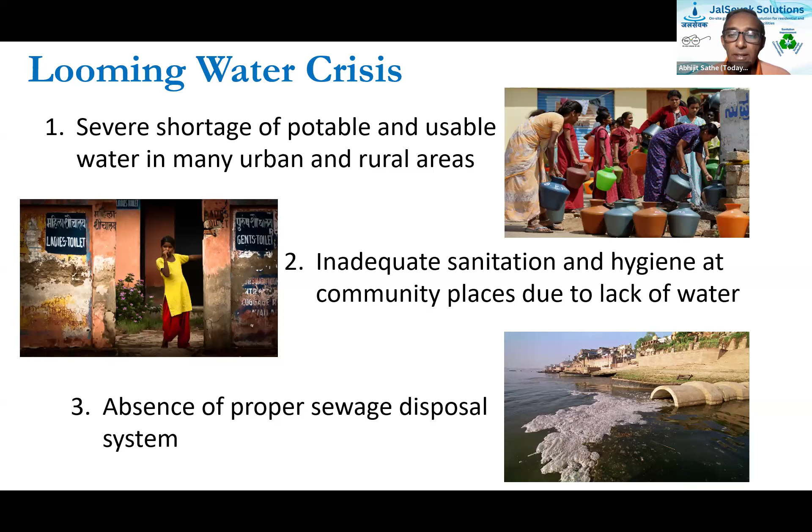And if you look at the size of a city like Pune, we probably generate hundreds of millions of litres of wastewater per day, and all of that either is treated very minimally or it doesn't get any treatment at all. So this has caused very severe pollution in our rivers, as we can see in Mula Mutha and other rivers around Pune. And this situation is very similar in most of the Indian cities and communities. So we are trying to address this problem by recycling our own wastewater on site. So these are the challenges.

If we think about any wastewater solution available, we only have the centralized sewage treatment plant as the only option. And these are only suitable for large facilities. They often come in size of half MLD or even bigger than that, 2 MLD, 5 MLD, which are suitable for big apartment complexes, municipal size plants and so on.

The STPs are very high in both capital cost as well as operating cost. They need a lot of area, a lot of planning. Upfront capital is required. They consume a lot of electricity. We have heard this feedback from so many societies or committees saying our STPs are not working because of the maintenance issues or the very high electricity bill we are getting because of the STP, and so we have stopped using these sewage treatment plants.

So as a result, the only solution is to move to a decentralized way of treating our sewage. The centralized means of collecting all sewage in one place and then treating it, that doesn't work efficiently at all.

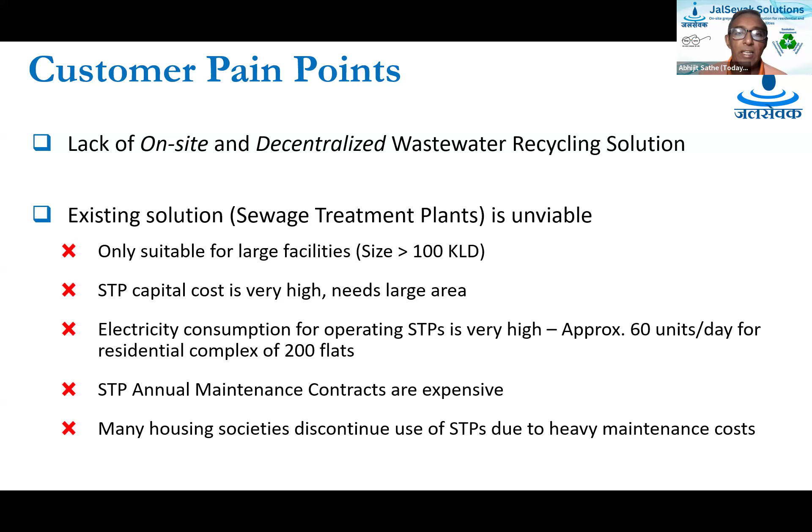So the only way, like I said, is the on-site treatment of our wastewater. These are some of our competitors. As we know, there are many companies in India who provide very sophisticated sewage treatment plants like VA Tech Wabag, Thermax, Siemens. There are many MNCs as well as local players, and all of these companies provide very large

STPs. They need a lot of size, and huge planning is required during the time of construction. It is impossible to fit these plants after the building is complete, they cannot be retrofitted, and they need, like I said, high capital cost as well as very high operating cost owing to the electricity requirement.

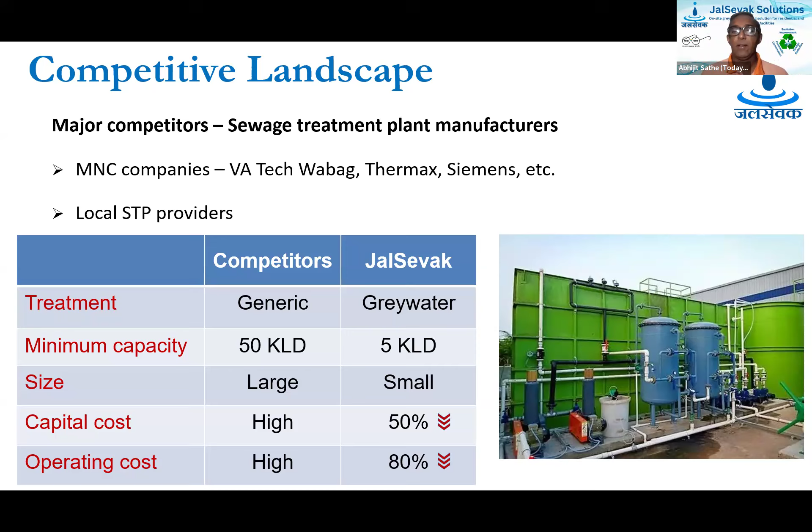So this is what we propose. We have developed this on-site and compact treatment plant to treat our wastewater from shower, laundry, washing machine, hand washing, dishwashing, and so on. All of this grey water is collected from either an individual house or apartment or a hostel or a hotel. It's collected into our plant, which is very small and requires very low footprint. And this water is treated using multiple levels, which I will show in the next slide.

And the resultant treated water is then reused in the same facility for flushing of toilets, urinals, bathrooms, floor cleaning, construction. PMC last year issued an advisory saying all the new construction projects should not be using fresh water. They should only use treated water for concrete mixing, curing, and other activities.

Right now, most builders either use borewell or tankers for the construction, which is consuming a lot of fresh water. So our effort is to also work with builders and developers to make this grey water available for their construction activities. And this is a very scalable solution.

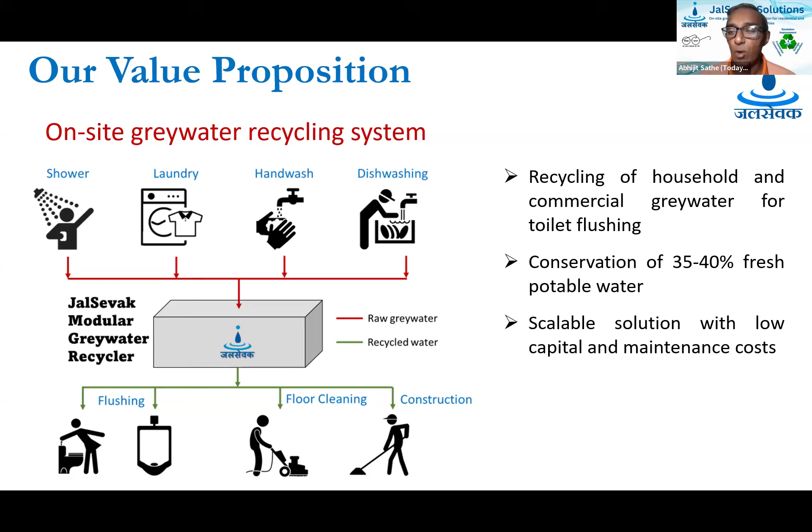We have installed this at places like an individual house where only 4 or 5 people are staying, as well as in a large hotel with 500 rooms, generating around 80 to 100 kiloliters of grey water every day. So this is a very scalable solution, and as I mentioned, it requires very less space, low capital, as well as low maintenance. Now I will pause this presentation here to play one short video.

So just allow me to play this video, and let me know if it is audible.

In today's rapidly urbanizing world, water has become a highly valuable resource. JalSevak Solutions is an Indian startup that is striving to address the most pressing issues our cities and towns are facing. On the one hand, there is increasing shortage of potable and usable water across several cities, leading to dependency on tankers. At the same time, most cities lack reliable sewage treatment and disposal systems, resulting in large-scale contamination of natural water bodies.

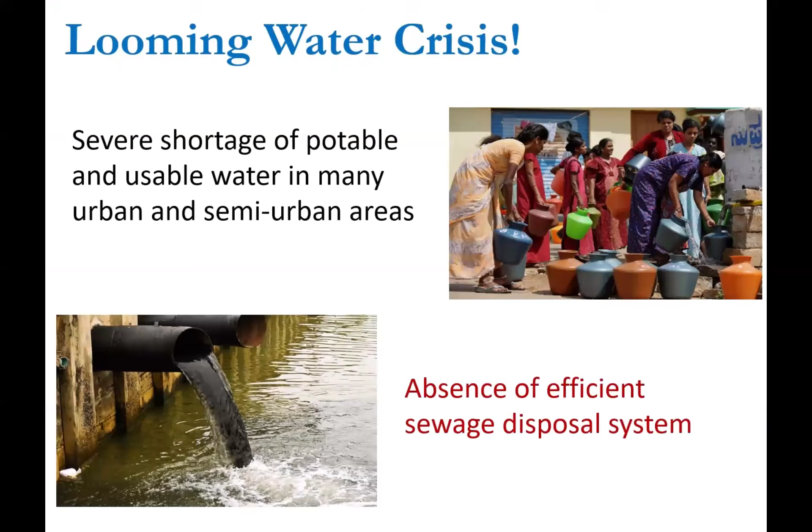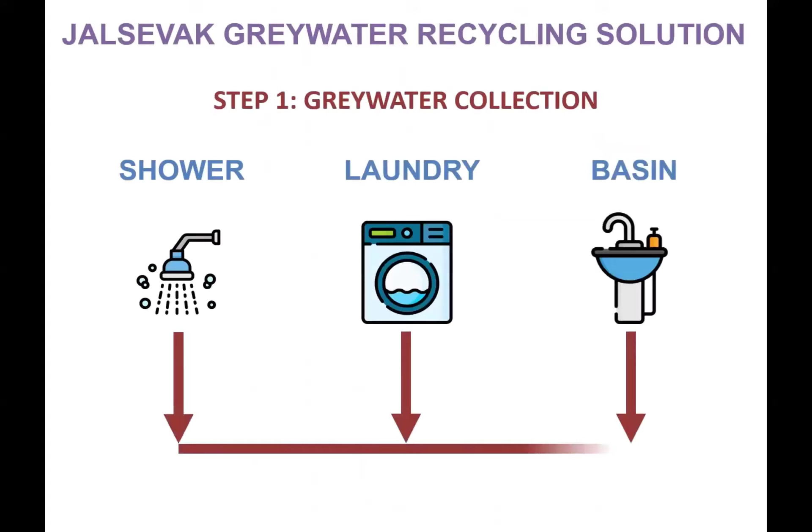Did you know that wastewater generated from our daily activities like shower, laundry and hand wash is called grey water? Approximately 55% of our household wastewater is grey water, while the rest is sewage. Using JalSevak's patented and cost-effective treatment process, it is now easy to recycle and reuse our household grey water. In the first step of the treatment process, raw grey water from shower, hand basin and laundry is collected using a separate drain pipe. The collected grey water is treated using coagulation, multiple levels of filtration, chemical treatment and aeration.

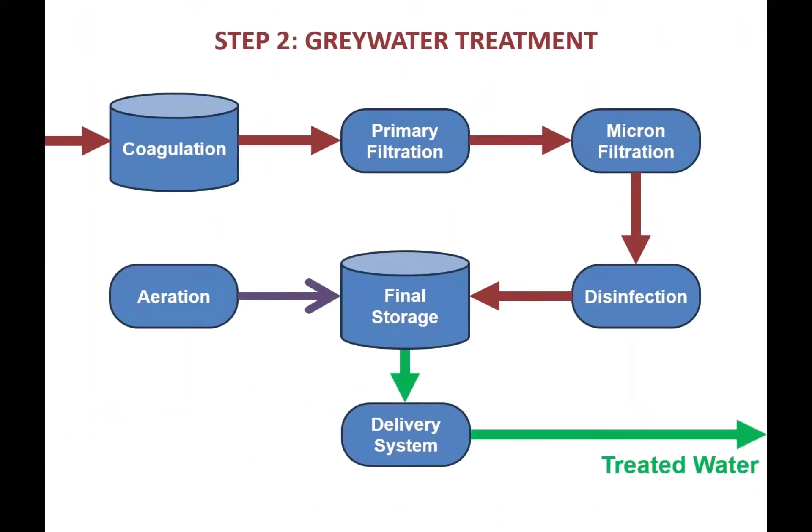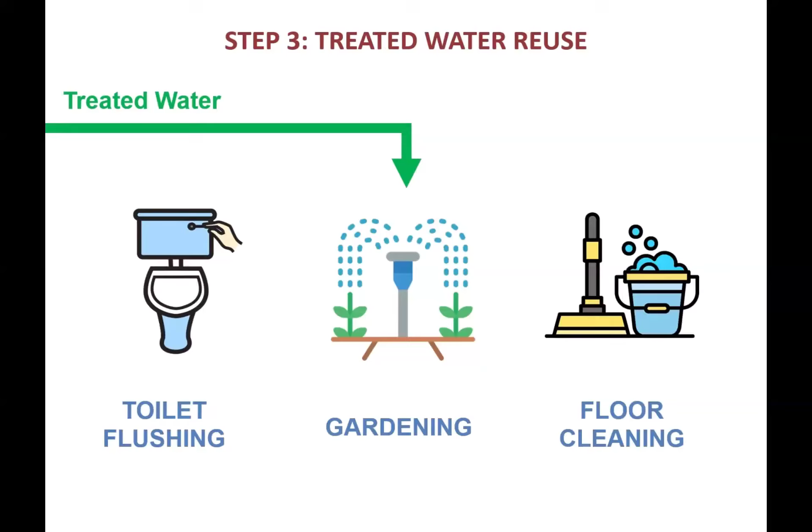These processes not only remove all suspended particles from the water but also destroy bacteria and pathogens. The system operation is fully automatic and requires least amount of human involvement. Finally, the treated water is sent for reuse in activities like toilet flushing, gardening, floor cleaning, etc. Quality of the treated water is closely monitored using parameters like pH, turbidity, COD, BOD and coliform. JalSevak's scalable, affordable and sustainable treatment solution can potentially save 30 to 35% freshwater in every household by recycling greywater.

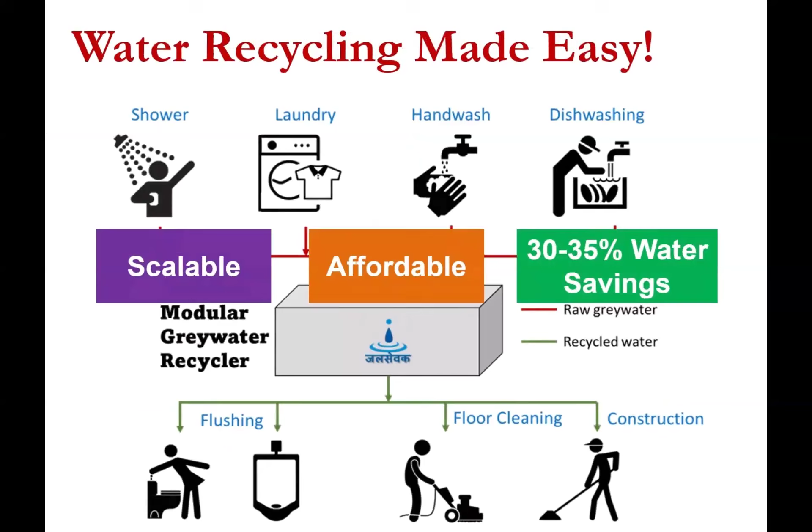This solution is ideal for installation in facilities like homes, apartment buildings, hostels, hotels, resorts and so on. It can be installed in existing as well as under construction facilities. JalSevak Greywater treatment system has received CII Green Pro eco-labeling that makes it suitable for installation in certified green homes. Griha Council has also included JalSevak system in their green building materials catalogue.

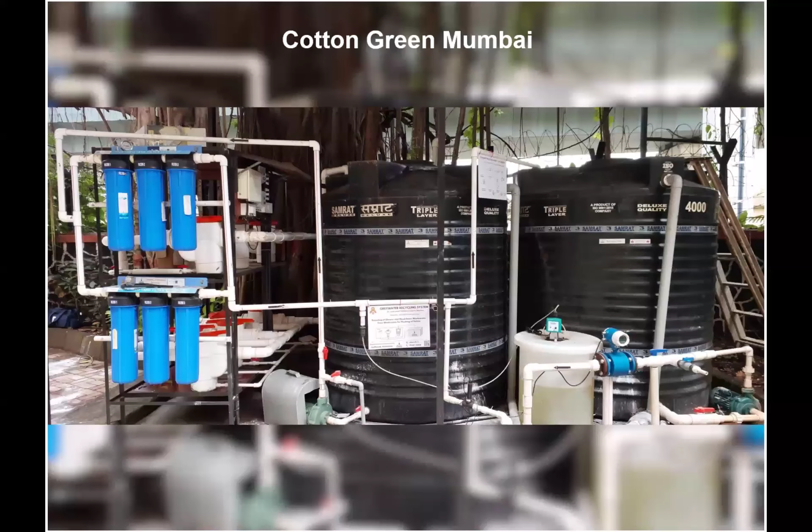Out of the 17 Sustainable Development Goals adopted by the United Nations, JalSevak Greywater Recycling Solution satisfies these three goals: clean water and sanitation, sustainable cities and communities, and climate action. JalSevak Greywater recycling systems are working in facilities like resorts, charitable trusts, hostels, with capacities varying from 1,000 litres per day to 80,000 litres per day depending on number of users and application of treated water.

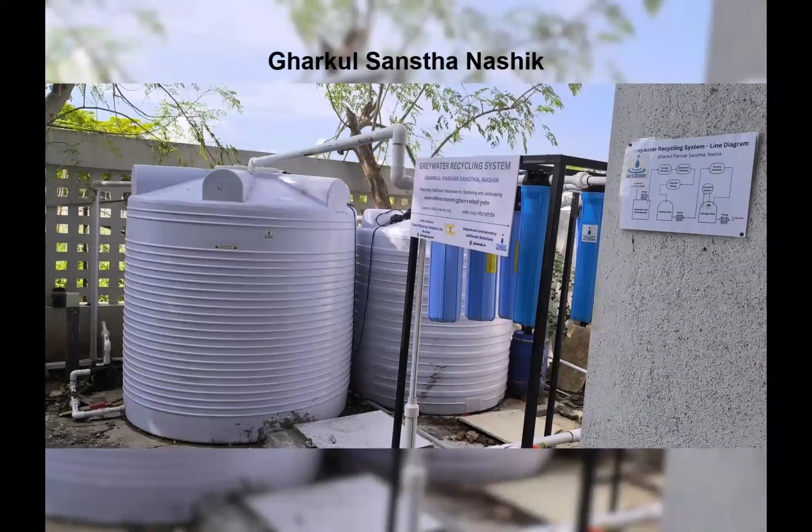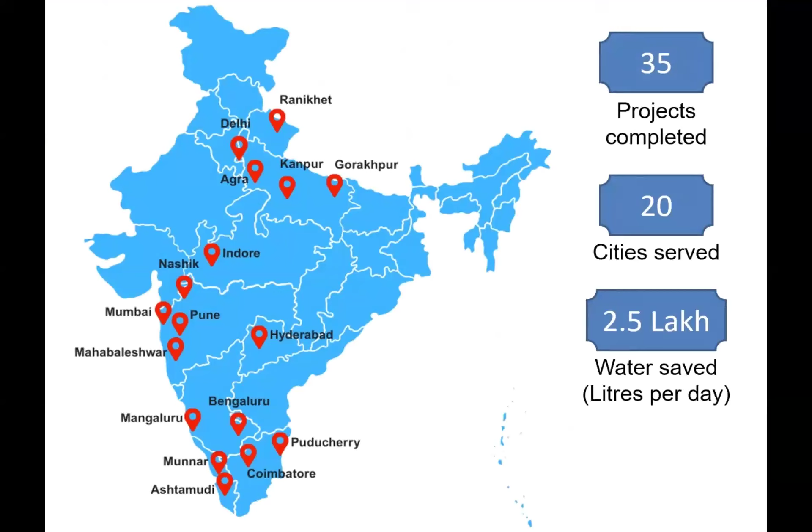With over 35 plants already operating in more than 20 cities across India, JalSevak recycling systems are saving around 2.5 lakh litres of fresh water by reusing shower and laundry wastewater for the purpose of toilet flushing and gardening. They are also reducing tanker dependency in water-sensitive places, leading to lower carbon footprint.

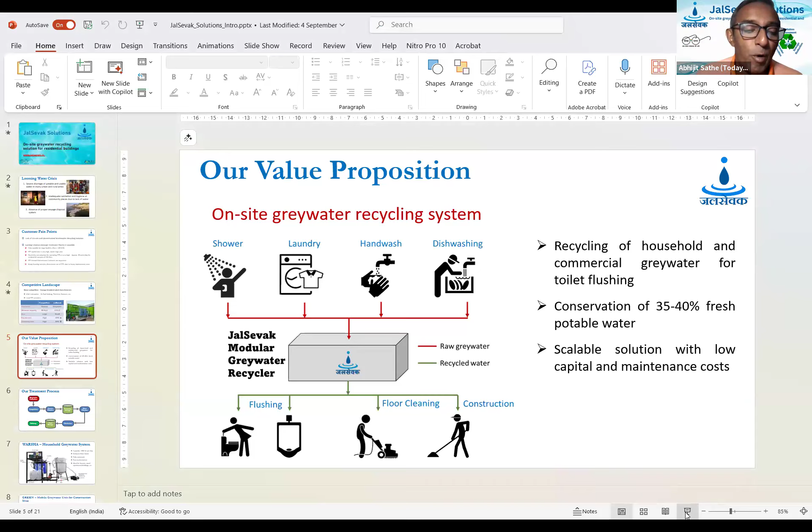Okay, so as I mentioned, some of the points which I'm going to talk about are already explained in the video, so we can move on quickly. So as I mentioned, the grey water is collected using dedicated piping. Most of our buildings have two separate pipes coming out of the bathroom. One is a large pipe that carries sewage from our toilet, and the other pipe from the bathroom is a smaller pipe that has all the grey water from our bath, washing machine, basin, etc. So this separation is already happening.

What happens? At the bottom of the building there is a chamber where both of these, black sewage and grey water, get mixed, and then it goes into the septic tank and so on. So our objective is to separate out this grey water pipe before it gets mixed into the sewage, and then treat it using our system and reuse the treated water. And so we have different sets of filtration.

I have some photographs also where the water is treated using a coagulation method, where we add a small chemical for settling of all the solids, dirt, oil and so on. After that, it is filtered using multiple levels of filtration, including a micron filter, a carbon filter, and so on. And finally, it is stored in a delivery tank, from where it can go into the different applications.

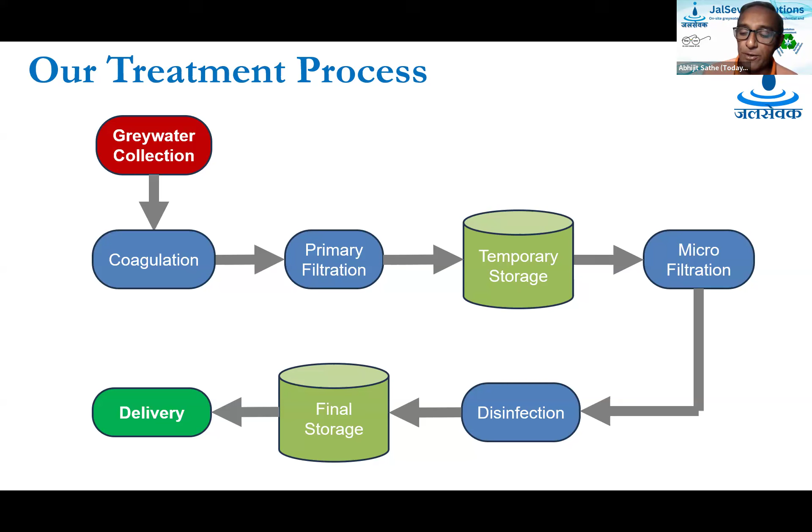Like I mentioned, flushing of toilets is the most common application. Gardening, landscaping, all places where fresh water is required but we don't need the water to come in contact with human beings. All these applications are suitable for this treated water. We have developed a very compact system called WARSHA. It stands for Wastewater Recycling System for Household Application.

It comes in a size of 1,000 to 2,000 liters of treated water per day. As you can see, it's a very small system where on the right side you have a collection pump which sends raw grey water into this treatment tank, where we have a very small dosing of chemical to settle down all the solids and dirt particles. Everything gets settled down, and then it gets drained through a drain hole at the bottom, and the treated water is then passed through a small pump into a

three-stage filter, which removes any particles, dirt, anything up to 5 micron size, followed by an activated carbon filter and so on, which completely removes all the dissolved gases, odor, everything. And then finally it is given a small disinfectant treatment in the form of sodium hypochlorite. This is to stop the development of any secondary bacteria or pathogens that would cause a foul smell.

Most of us, when we think about treated water, recycled water, the first thing that comes to mind is this bad smell. In this case, we have eliminated that biggest worry. There is zero smell in this water, owing to all these different kinds of filtration and treatment. And then finally the water is ready for use in the household for flushing, as I mentioned.

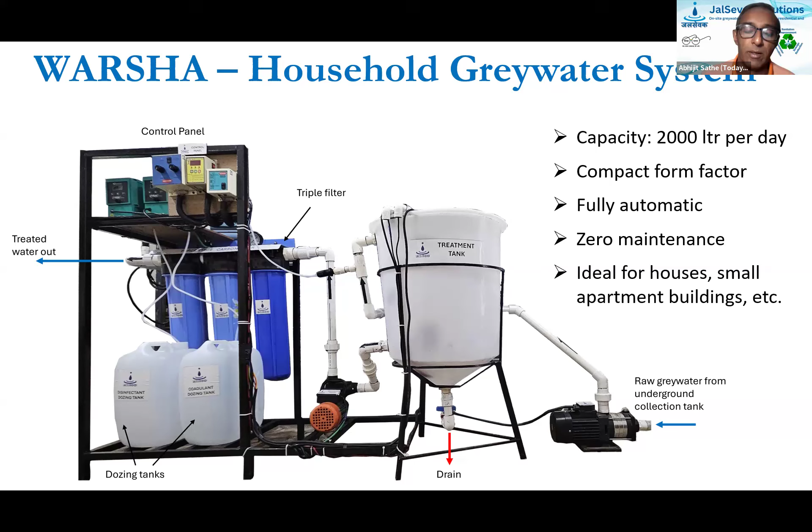This particular unit occupies only 8 feet by 3 feet of space, which is very small for an individual house, and it can be put on the ground floor or on the rooftop, depending on the space constraints. So right now we are installing this system at several places in Bangalore and other cities where there is a real shortage of water, where our customers require this kind of very compact solution, because there is no space in their house for a large system.

The labor, their families, all of them stay on the site in the temporary accommodation, and they consume all the water for washing, cleaning, taking bath, washing their clothes, and so on. And all this water just goes into a nearby ditch, without treatment. At the same time, the builder is buying tankers for construction activity. So why not use this kind of portable and mobile greywater unit for treating this greywater on site, and then using this water for construction activities.

So this unit is installed in the back of a tractor trolley, which can be pulled to any construction site, and it can be installed in a matter of a day, where it will stay on the site for as long as the construction is happening. Once the construction is complete, this plant can be moved to a different place. That is the idea. This is also available for a long-term lease.

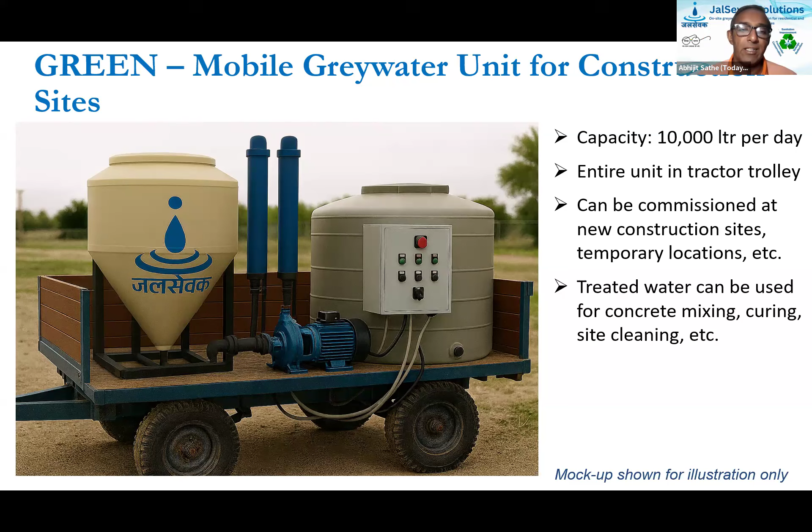If the builder does not want to buy this unit from us, we also provide this in a lease fashion, where they will pay us for the use every month, and we will maintain and operate this unit at the builder site. So we believe this unit will solve a lot of problems in relation to construction projects, which consume high quantities of fresh water, most often from a borewell or a tanker, and this will be a very sustainable way to build buildings in the future.

So as I mentioned in the video, we have a patent. There are two patents we have filed. This one is already granted for this compact and scalable treatment plant. And the comparison of the raw water versus treated water can be seen here. The treated water is perfectly fit for applications, as I mentioned, in flushing of toilets, gardening.

We do not recommend this for washing clothes or washing cars or taking bath again, because of small chemicals available in the water, as well as any risk of infection, even though such cases are almost non-existent. But the International Water Standard says this treated water should not be used for any other application unless it is further treated using RO or any higher kind of biological treatment.

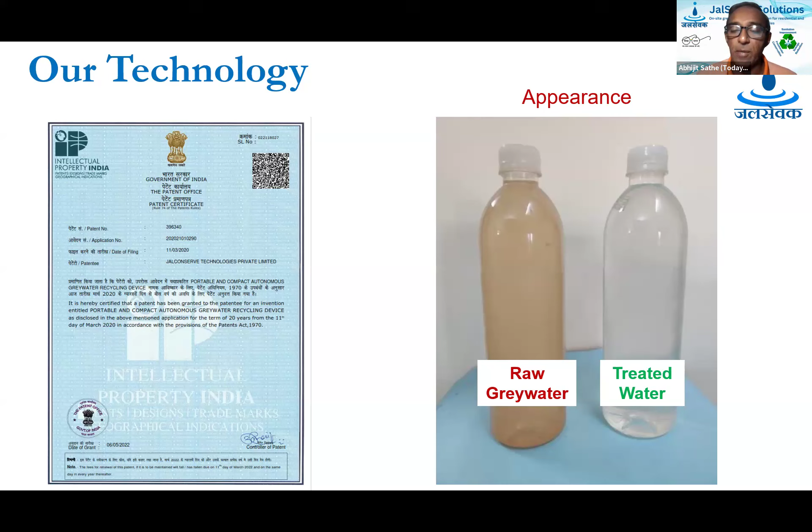Our customers are largely in the hospitality industry, builders, architects, NGOs, as well as individual homeowners, apartment buildings, and so on. We are also working with some government agencies like the Municipal Corporation. We have installed one plant at Nigdi Pradhikaran in a building called Yashwantrao Chavan Smarak. So it's a public building with shops and a marriage hall and so on, and it also has a hostel for underprivileged boys who stay there, and their greywater is then used for gardening and so on.

And the revenue stream: we sell the unit directly to the customer, and then there is AMC and spares sales also involved. We started in the year 2020, and we have grown steadily. Last year, our revenues were 75 lakh rupees, and this financial year we are expecting to do almost 2 crore of total revenue. We have received green certifications from CII GreenPro.

This is the Indian Green Building Council initiative where they collect the catalog of products that are fit for application in green building, like solar panels and recycled bricks and so on. So our product also meets that standard, where if the building wants to be certified as a green building, they can use our product for the treatment of their wastewater, and then this building can receive green certification. Likewise, there is the GRIHA Council which gives this catalog for residential buildings that want to be known as green buildings. Our product is available on both of these catalogs.

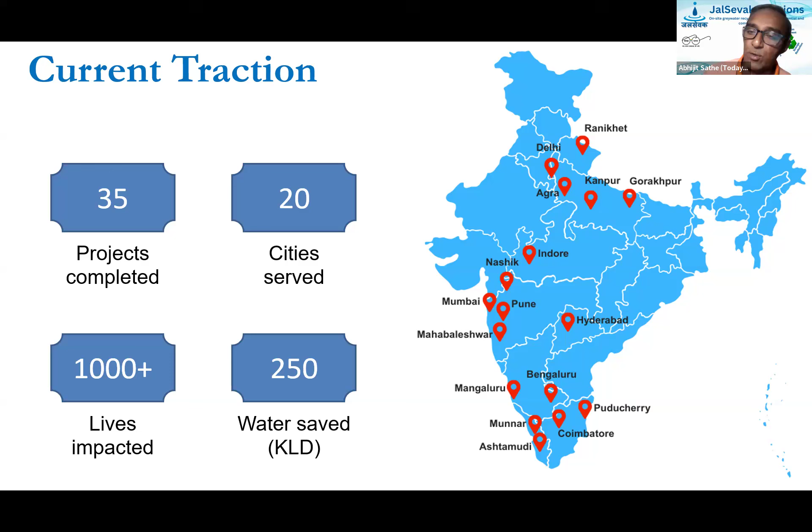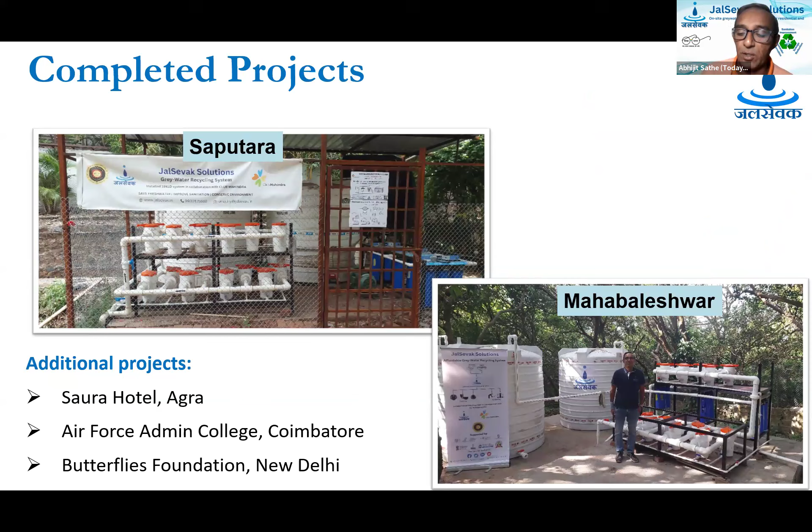Some photographs of our plant are shown here. It shows the filters and other tanks and pumps and so on. This is at a Mahabaleshwar resort. We have installed at a cancer hospital hostel in Mumbai, in the Cotton Green area. Additionally, there are other sites in Agra, Coimbatore, Delhi, and so on.

Some of our major clients are PCMC. Maharashtra State Electricity Board has installed one plant in Nashik. They are looking at more plants at some of their training centers. The Suchitwa Mission, which is a government body in the government of Kerala, has empaneled us as a vendor for supplying grey water plants to all their nagarpalikas and panchayats and so on. So we have a large interest from corporate as well as government bodies to increase our footprint across the country.

So the impact is obvious. We save fresh water, at the same time we reduce sewage. Additionally, we have seen improvement in sanitation in places where there is very little water available. We have installed our plant at a slum area in Bangalore, where they get water only once in 3 days, that also from a tanker.

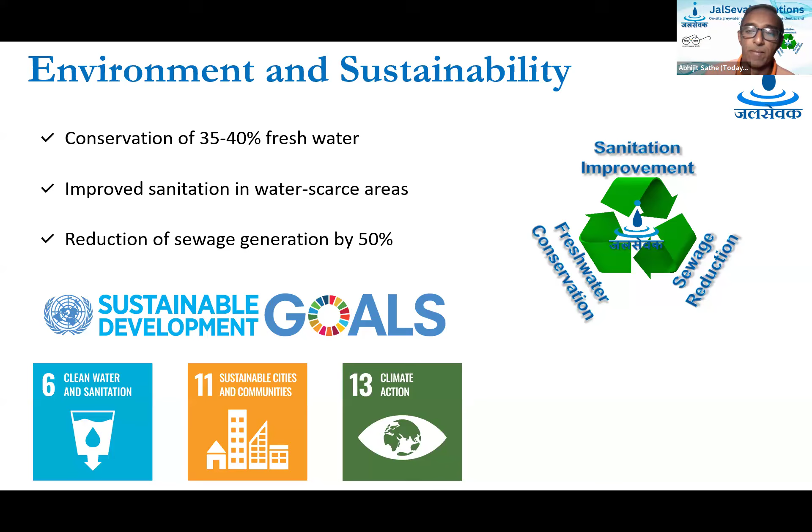So there we have installed a plant in a public bathroom and toilet facility, where around 50 people are using it daily for all of their sanitation activities, and they have seen dramatic improvement in hygiene of this place because of the availability of treated water. We have received some media coverage from places like Better India, Indian Express, and The Hindu, and so on.

I have done my PhD from the United States in mechanical engineering. I worked at places like Parker Hannifin and other companies in both the US and India before starting this journey. I was also working as an incubation center manager in IIT Kanpur as well as in MIT World Peace University before starting this journey of my own.

We have a team of five people. They have different skill sets in operations, design, marketing, and so on. We are supported by IIT Kanpur and by different government initiatives like the Ministry of Housing Affairs, MSME, EIL, and we have received some funding from Citibank and Buddha Institute and so on. And I believe this is the last slide.

Our factory is located in the Nanded Phata area on Sinhagad Road. If anybody wants to visit us and see our product in person, we'll be very happy to welcome you to our plant and explain the different aspects of our system. So that is all from my side. I'll be happy to take questions or any comments or points.